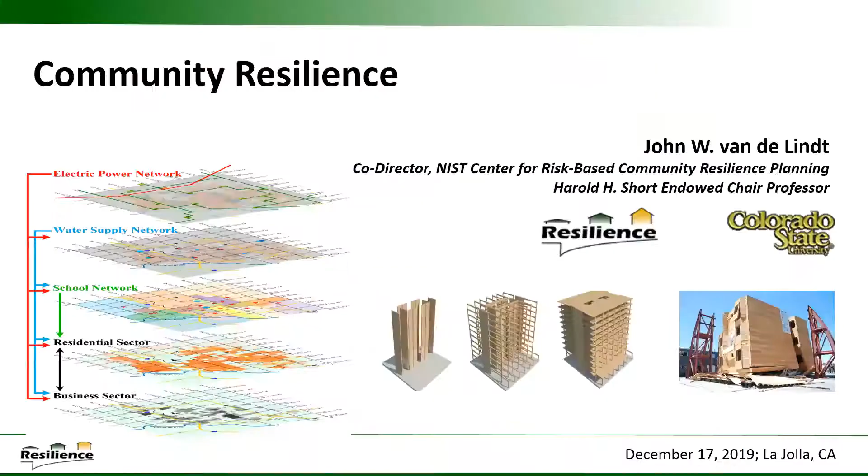So first, let me start with something that we're all familiar with. Some of you are probably still paying back student loans. This is the same Stafford Act - Robert Stafford - but this is 1974. The Disaster Relief Act was created by Nixon, and then Carter moved that forward with an executive order.

Then finally, in 1988, Congress enacted the Stafford Act, and the intent was that local and state governments can develop disaster preparedness plans.

So switching gears a little bit - what's the purpose of having physical infrastructure? Well, if you look at the very bottom of Maslow's hierarchy of needs, in the red, these are the physiological needs - having shelter and food and things like that.

As we move up, I don't know that any of us necessarily get to the top, but when we go to the orange and the yellow, what we're dealing with are things that bring socioeconomics and other specialties or disciplines into play.

And we can't achieve those without that. A good example - you can't read that on the bottom right, but I'll get into that in a little bit. And that's really the motivation for one of our studies.

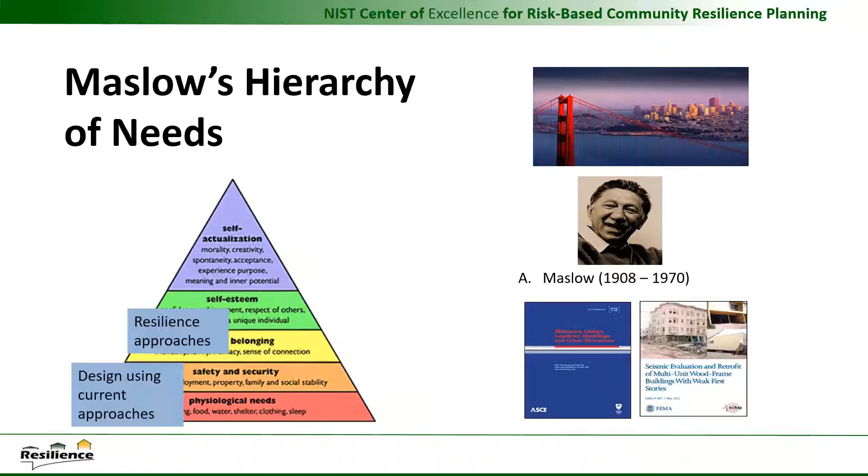Okay, so let me jump to PPD 21. Once a presidential policy directive goes into place, the funding flows. The funding follows the presidential policy directives because the agencies follow that, and they direct NIST, NSF, USDA, you name it.

The White House is essentially directing that and assigning where the funds will flow. So for this one, back in 2013, this was the Obama administration, and this was PPD 21, essentially establishing resilience as a priority for the U.S. This was primarily infrastructure resilience.

If you look, DHS, Department of Homeland Security, defines I think 16 or 18 different critical infrastructures, but to have those then support effectively communities or community resilience. So the big takeaway - these are the three big takeaways that I pulled from it. Of course, it's 3 or 4 pages long.

So community resilience itself - it started actually in ecology. There was a landmark 1973 paper by Holling that talked about ecological resilience. Then it moved into social science and urban planners, and then into economics, and then engineering. We were really late to the party - we were back in the early 2000s in Buffalo and then some other places.

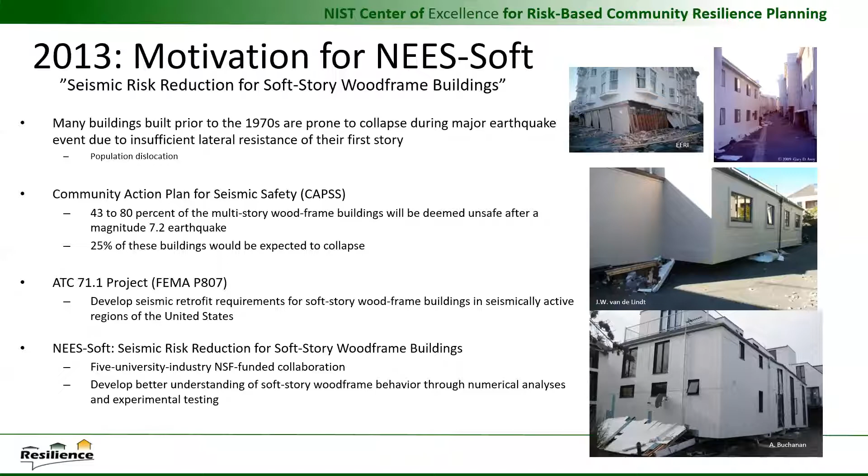The schedules didn't quite align due to availability, so we wound up doing those concurrently. I was flying back and forth from San Diego to Buffalo for a few months, which I liked the San Diego weather better, just for the record.

Okay, so this was the life cycle of the test building. I'm not going to present each one, but I'll talk about them here briefly.

Of course, we had construction and got ready for testing. We did cross-laminated timber rocking walls. They weren't designed to rock like the ones I'll show you for the 2-story and 10-story test on another project, but they did rock, though they weren't post-tensioned. This was done by applying the FEMA P807 software to determine what the retrofit should be. There were walls taking shear in line with the direction of motion, and transverse walls reducing the torsional effect, done exactly per P807.

Within this project, we also had a steel special moment frame designed using the FEMA P807 approach. The idea was to have something practical for designers, but also a performance-based seismic retrofit method developed as part of the project. This was NSF style, taking some work from the early 80s that Anil Chopra developed, and extending it to include torsion and things like that.

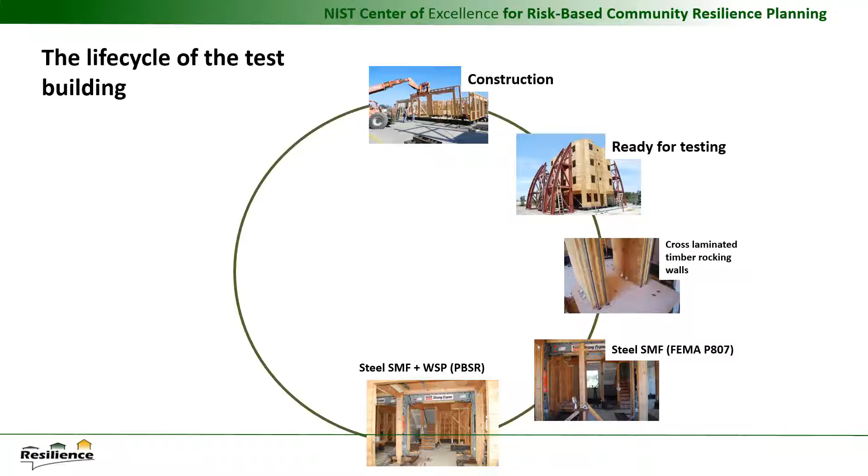We also looked at dampers using a performance-based seismic retrofit, and these were Taylor device dampers—probably the smallest they've ever made, because of course wood's light.

And then we did a collapse test, which is the one I'll show you today. We pulled out all the retrofits.

The main reason, at least for wood—and I think it's the same for most structures—the main reason for a site like San Diego is you can test whole buildings, particularly with wood, because there are so many other components and little parts that you put together. We know exactly what a shear wall does, we can model that, we can model all these components, and then put them together, but our system model doesn't predict it very accurately because there are too many interactions going on. So I've made the argument on multiple proposals that we've been awarded that we need whole building tests.

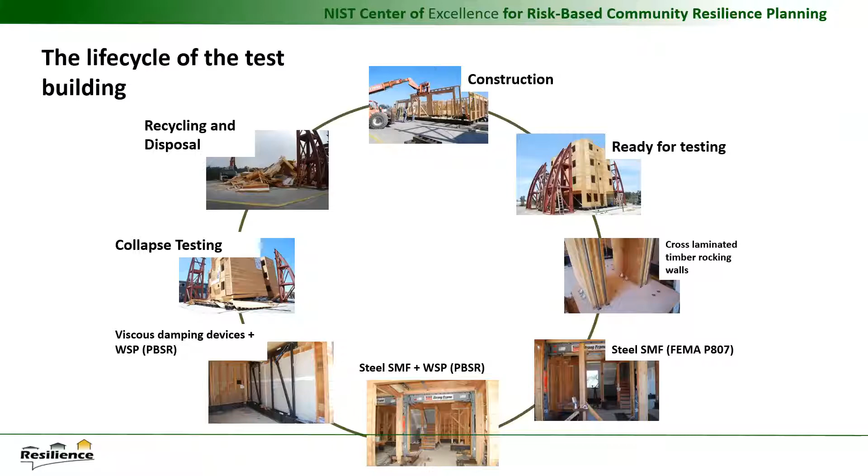And then recycling and disposal—I heard that talked about yesterday, and they did it in a day actually, which included taking all the steel out, so it was fast. That was Casper, yeah. And I think they didn't damage anything of yours too, so.

Some quick construction photos, just kind of going up. We did do a little prefab—you can see that's a wall on the left. We prefabbed some sections of floor and then connected them, so it went up pretty fast, in a few weeks.

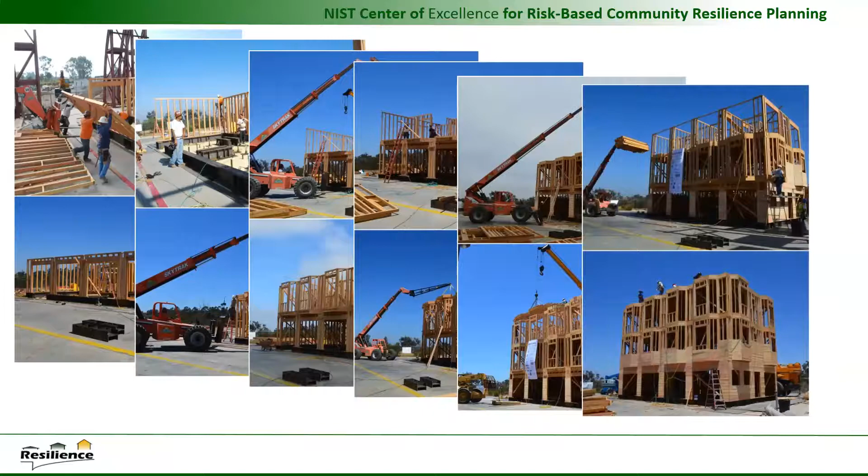These are some typical buildings. They tend to be anywhere from 10 to 14,000 square feet, so they have multiple apartments in them. When I say there are 4,000 to 6,000 of these in the Bay Area, each one has between 8 and 20 apartments with a couple or family in them, so it's a lot of people. And this is what we looked like—not exact, but the best we could do anyway.

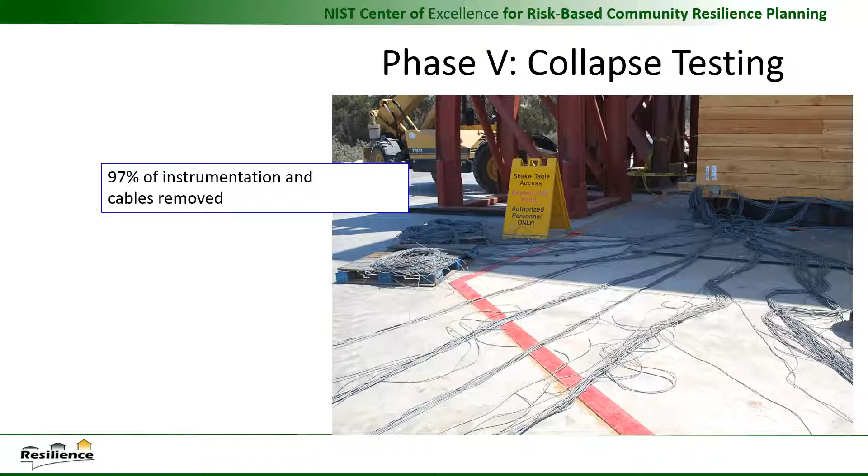Okay, so the retrofits all worked as they were supposed to. I'm not going to talk a lot about that because I want to get through everything today and get to some community resilience aspects. But for the collapse testing, what we did is we removed 97% of the instrumentation. 3% was sacrificial, meaning, like Tara said yesterday, we wrote a check to whoever—probably Robert as well.

And so for the collapse motion, we had to pick what it was going to be. We had been testing primarily Cape Mendocino and Loma Prieta, and they were good motions. Loma Prieta was the one that affected the Bay Area in 1989, and a lot of these buildings were rendered in need of demolition or very serious repairs. Believe it or not, even though it collapsed a freeway, it wasn't that large a motion compared to, say, a 7.2 on the Hayward fault.

So we looked at these, and if you look on the right, the one in the middle, scaled to 1.8 G spectral acceleration. You can see our building period, retrofitted it was around 0.5 seconds, unretrofitted it was about 1 second for a 4-story building. That's how soft these are.

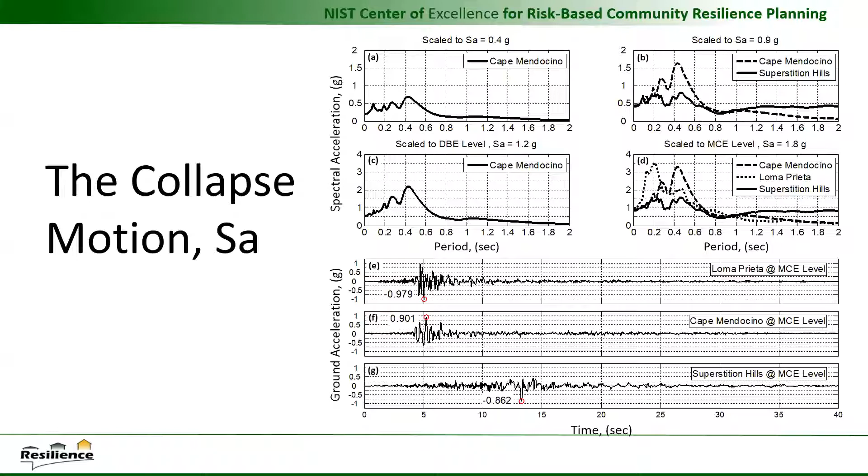Looking at that, at 1 second they all kind of intersect right there. So who cares, right? But then if you take a look at the spectral displacement, the choice is clear. It's Superstition Hills, because if you start at 1 second, we're going to elongate that period probably 2 or more seconds, and it's going to just climb right up.

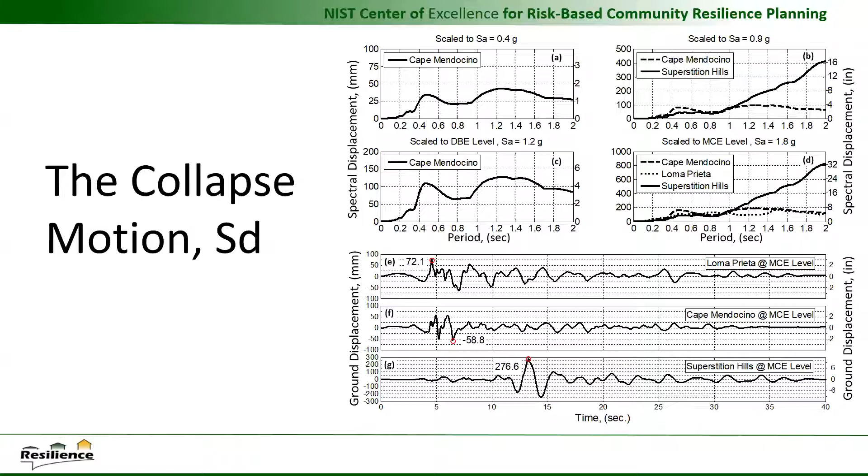I learned this from the Japanese researchers over the years, going to Japan and participating in testing over there. They've done a lot of collapse tests at E-Defense. Lack of strength and stiffness doesn't collapse buildings. It can, but what collapses buildings is geometry. It's basically pulling the rug out from underneath it.

This is our shake. This is Superstition Hills at MCE. And there's not a lot of stiffness on that first story. All the retrofits are out. That's the undergraduate student enjoying himself videoing.

So yeah, sorry about him. Okay, so that was Gabriel. So we're at, he did go on, yeah. That was Gabriel yelling, and he did go on to graduate school.

So it worked. We're actually close to, it settled at about 15 point something, but it actually went to 17% interstory drift at that first level. And the top levels were virtually rigid. Now the interesting thing is those top 3 stories are actually far below code, but the bottom story is so far below, it's so soft that this is what you get.

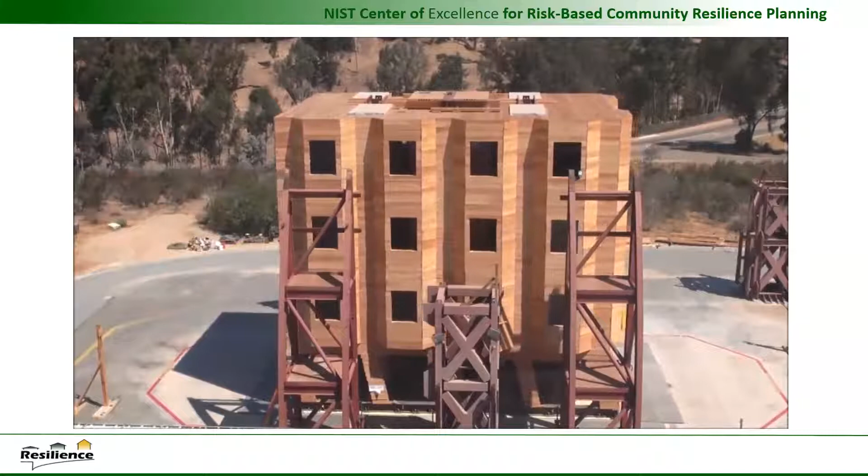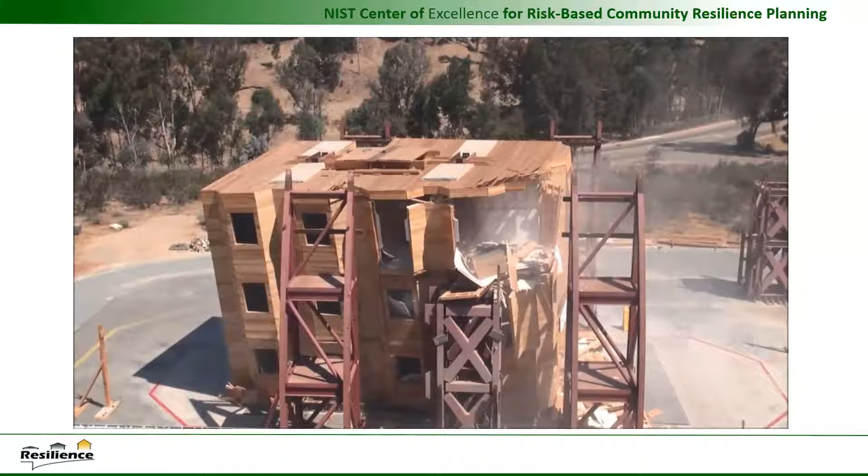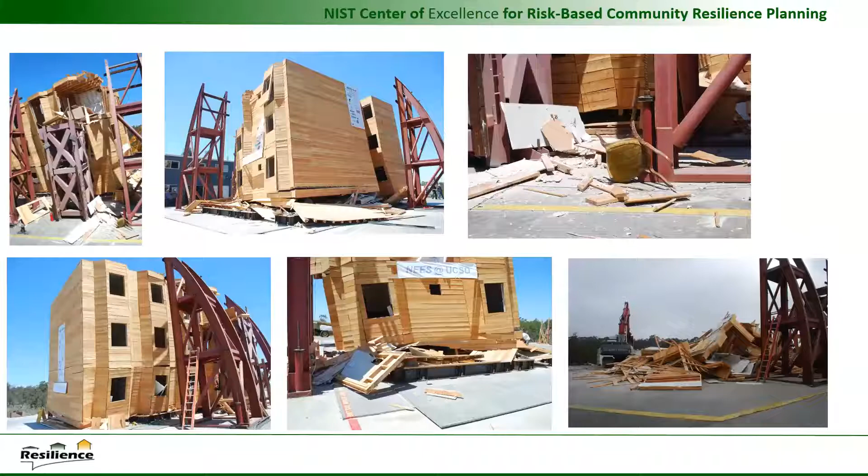All right, so that's what happened to your camera. So this is, essentially, what was a 4-story building. And it would have fallen to the front where the garages were, so it would have probably fallen into the street and blocked the street.

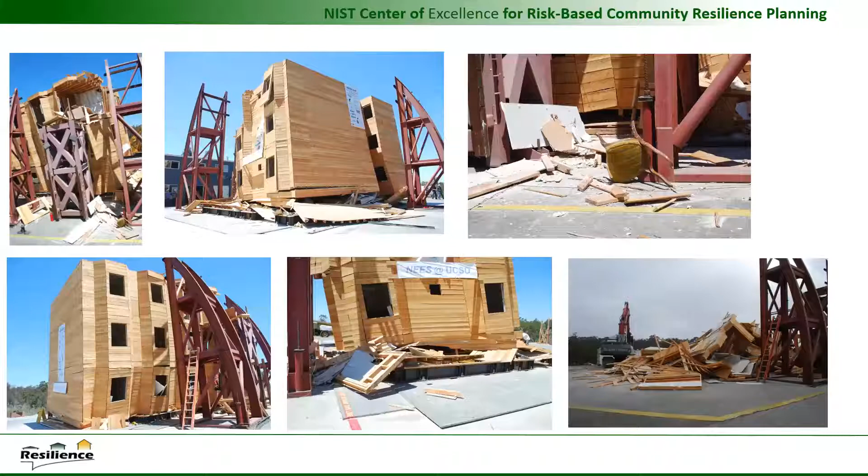Okay, so now what you saw is a building that doesn't perform well, it doesn't satisfy the objectives of society or the goals of a community. So now I want to fast forward.

This is the project you've been hearing a little bit about. I think there was a poster out front from my colleague, Shiling Pei, who's leading this. Lehigh is doing some testing, you saw that yesterday, Jim presented as well on the same project. And those are all, there's 6 universities.

So for 6 universities, to give you an idea, we requested, there were different budgets. Some were 200,000, some were 4, but in the end I think it was about 1.5 million. 6 universities went in as a collaborative project. And then we are fundraising and leveraging to try and essentially close the budget gap for the test that I'll describe here.

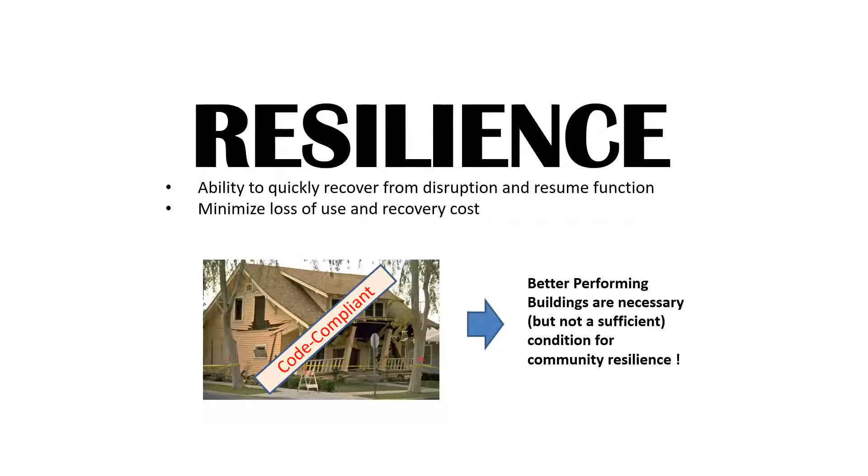But before I do that, just a little bit of, and so these slides, Shiling Pei at Colorado School of Mines had developed these slides some time ago. But he's showing a code compliant building that's in very bad shape after an earthquake, and that does happen.

To give you an idea, mass timber, or in this case cross-laminated timber, it's essentially just these large layers of wood. I think Jim described it yesterday, so I'll skip that. But the research started in Slovenia and Macedonia, and then it moved into Italy.

They did a 7-story test, or 6.5, at E-Defense in Japan, and then there was some Canadian research with FP Innovations in Vancouver. Then we worked on a FEMA P695 process. In fact, just a couple weeks ago we passed the ballot for the Provisions Update Committee of the Building Seismic Safety Council in San Francisco. So we just have a few more votes, and then it goes to ASCE 7. Hopefully you'll see cross-laminated timber and tables, if all goes well, in the next version of ASCE 7 - not fancy rocking walls, not things like I'm going to show you today, but more the bread and butter, build a hotel. You can go up to essentially 65 feet.

And in Japan, Hiroshi Isoda, our colleague, has been doing a lot of work. One thing he said - we were in Hawaii at a meeting a few months ago or last summer - one thing he said: I've been trying to collapse cross-laminated timber buildings for 3 years now, and I can't get it to collapse. And that's because of both the gravity system and the lateral system.

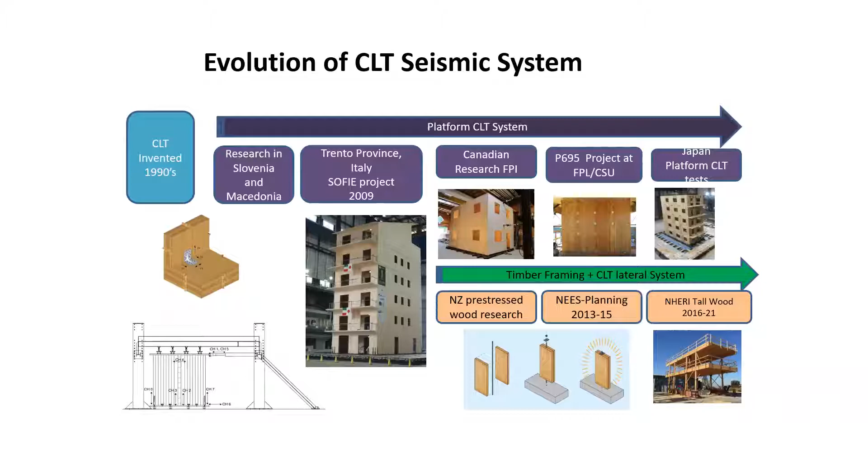This is the team. I won't go through it, but you can probably see it. It's kind of small - I don't know what happened to this.

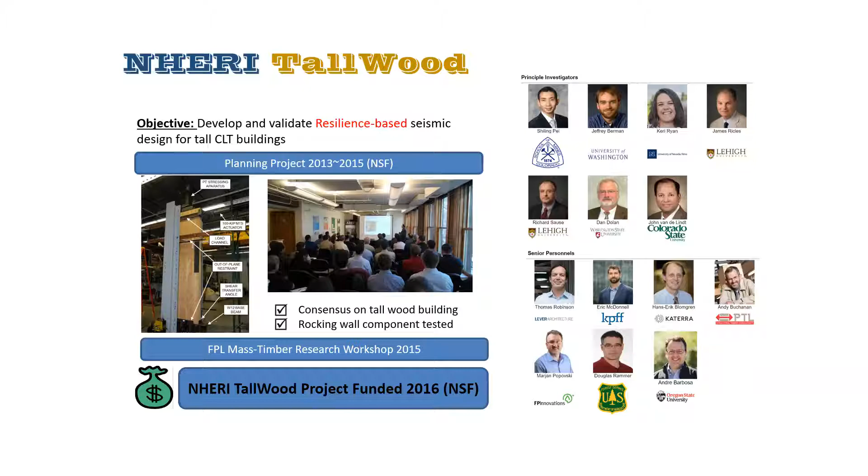And that's the key - you can't test a full building without that. So to give you an idea of the project, we did the 2-story test. There's testing at Lehigh, and I think that's going to bleed right into January 2020.

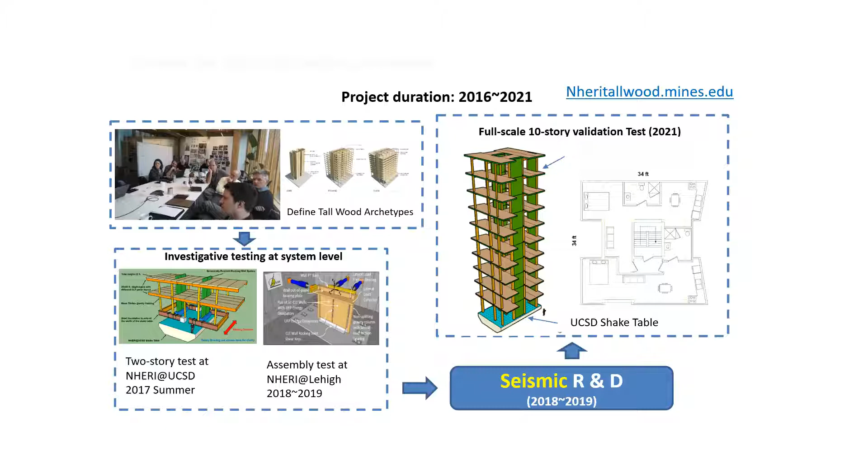And then the validation test - that's a collapse test, right, Joel? Are we doing a collapse test on the 10-story? Unless something goes terribly wrong.

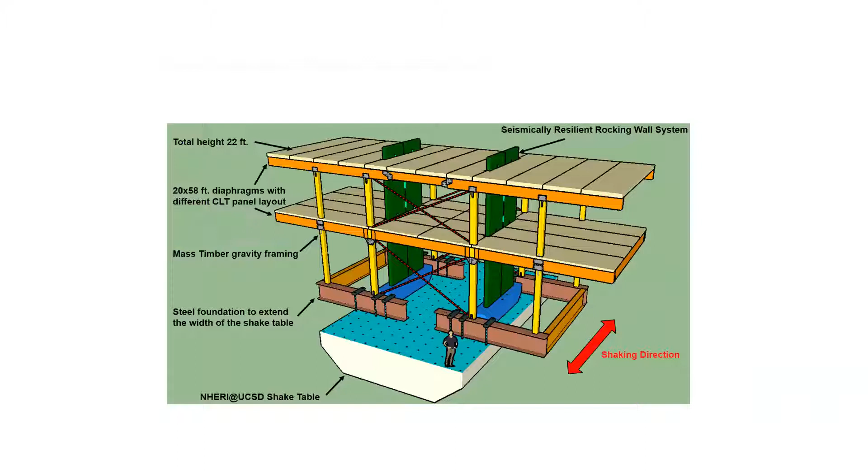So this was the specimen. You can see we're going to shake this direction, and you can see we're actually quite a bit larger - this was 50-some feet, I think 58 feet. So we're taking advantage of the fact that wood is light, and so this whole building is about 160, 170 kips.

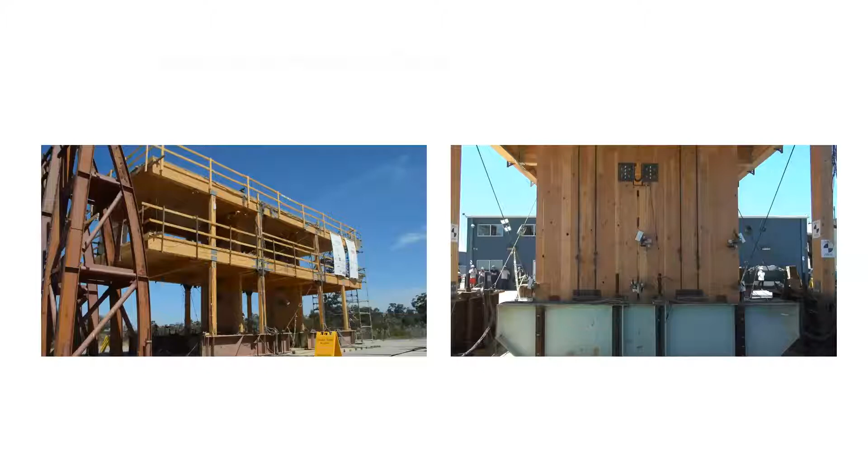And so these are post-tension rocking walls. You can see the post-tension rods here. Jose had mentioned the U-shaped clips there. I was going to try and get both these to play, but I don't think I can, right Robert? So I'm going to just hit them both, and - oh, it worked, okay.

And that, I believe, is Northridge Canoga Park. We're running the same record twice.

You can almost guess the period of the building, can't you, just hearing that? Exactly. Okay, and then here's another one.

The other one started by itself - Robert, the other one started by itself. Should I just click it? Okay. Same test.

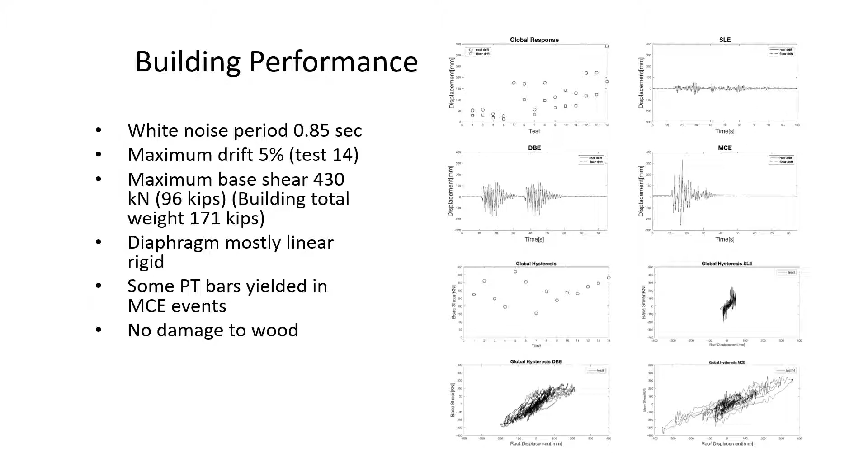And one thing I would say is don't underestimate the number of bodies you need on site. More people - don't ever refuse anybody unless it's a troublemaker. Otherwise, invite them.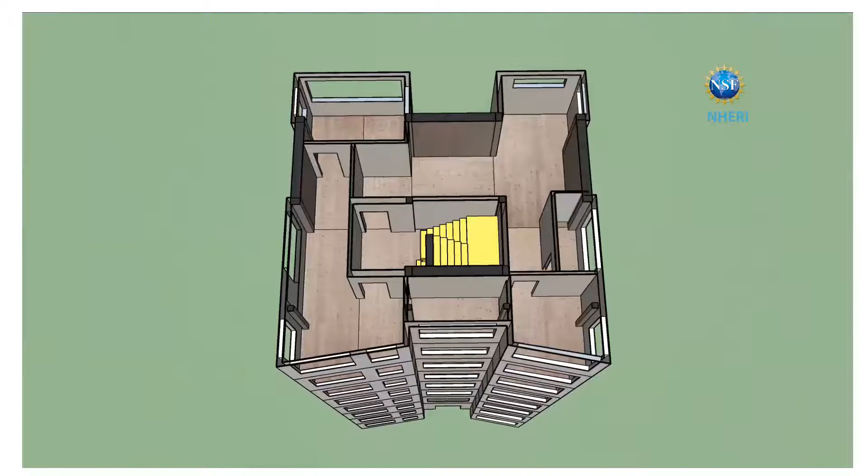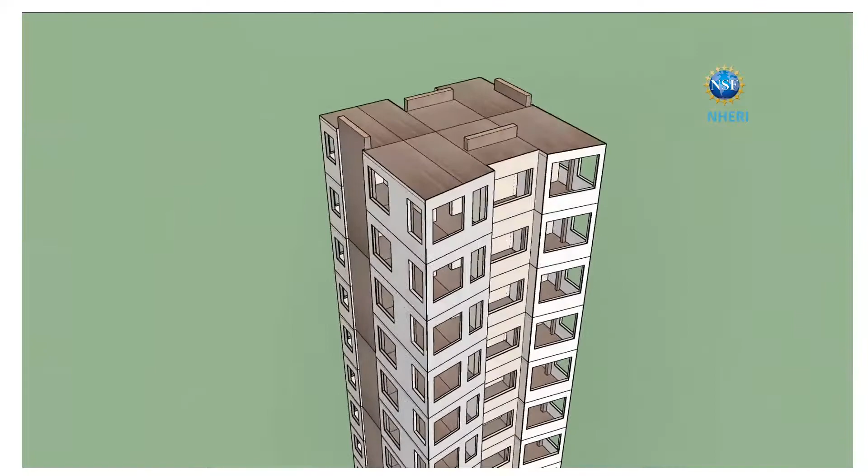And so this, so you can see it'll be - we're also considering, in talking to MKA Seattle and some others, we're doing some fundraising, so we may have some diaphragms that are nailed in under mechanical fasteners. Sometimes you have to, at least with these big projects, make concessions and include something you didn't originally write in, and just make sure that it works with your objective. You don't want to scrimp on any of those.

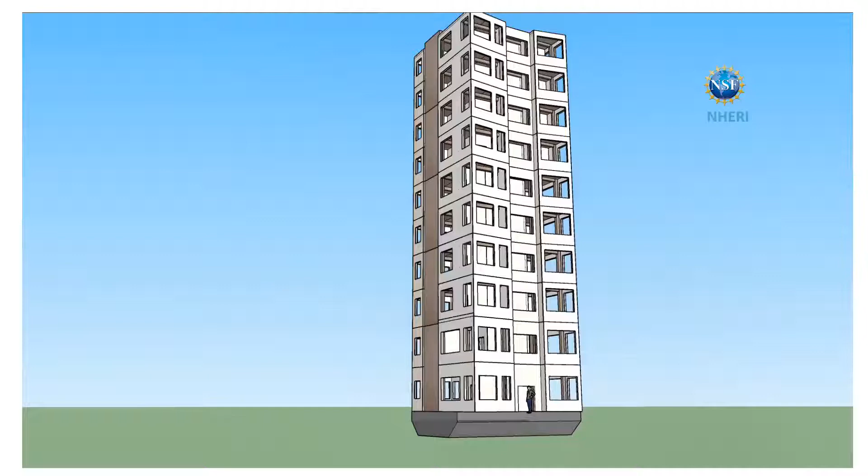So, no, this was it. Okay, well, I won't show you the whole thing, but...

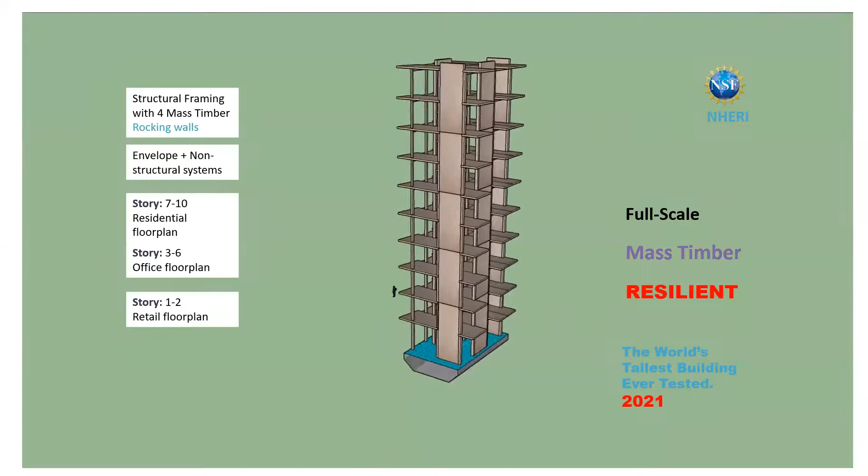And if the music's not making you smile.

All right, I'll go ahead and jump past since we've seen it. But so...

I mean, like completely over. And then in 2021, we'll be doing some staging in the spring, starting construction, and then summer is the shake table test.

Excuse me, I forgot this part. So probably the most important part is, not every Friday, but almost, for 2 to 5 minutes, almost every Friday.

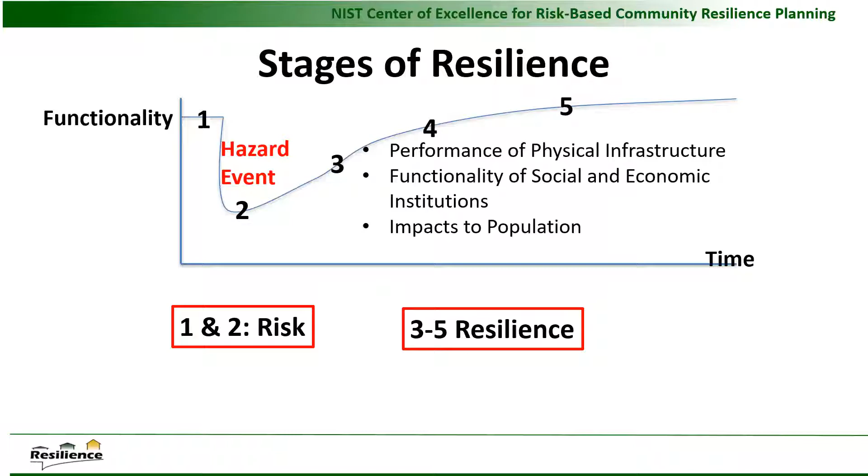To give you an idea, within the NIST Center for Community Resilience Planning, we're in the process of renewal review. We hope to have another 5 years starting February 1st. We'll know here in a few days, I think, actually.

To give you an idea, these are some of the things that are going on. But these are all areas where, even though they're being worked on, there are huge gaps—for example, earthquakes and tsunamis in succession.

We've looked at, people in the center and others have looked at modeling the earthquake effect and then the tsunami hitting. But do we have fragility for that? No. We have some—we have a method for it, but the capacity is not there.

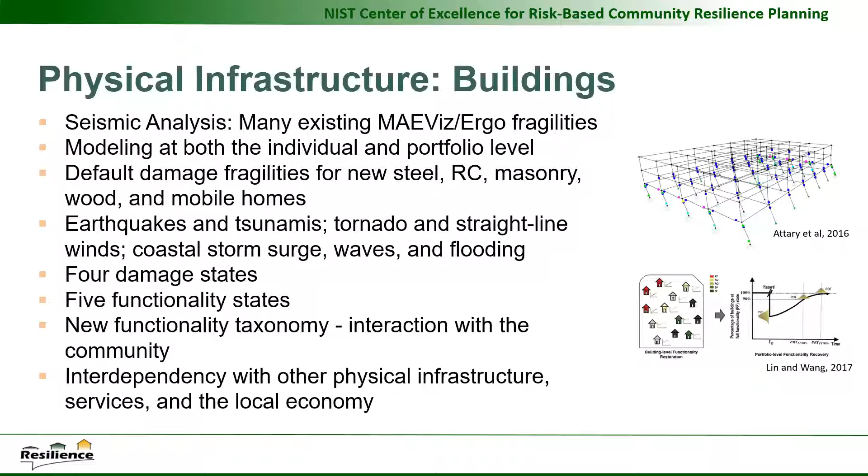So there's all sorts of physical infrastructure, transportation. I know Joy said they don't necessarily fund some of this, but they do fund it in the context of resilience—they fund network analysis, things like that.

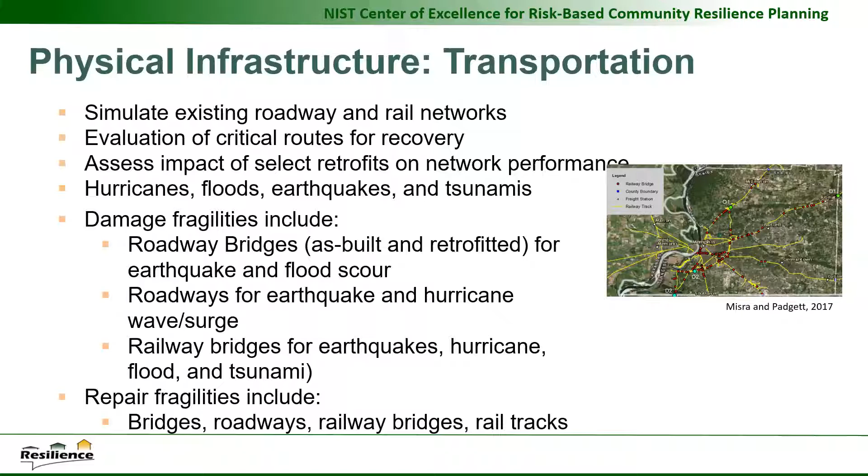So if you write it fundamentally, and don't just say 'I want to test this bridge,' but write it fundamentally and treat it as a basic research problem, then make the example application something like that, they will definitely review it.

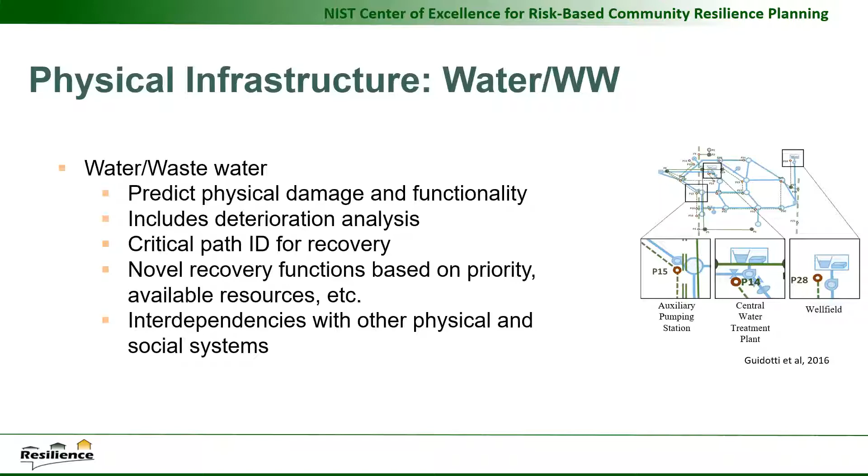...for the project, and the idea is to find that intersection so the building isn't the weak link, to make it functional—the building repair, I should say.

And so looking at electrical power networks, natural gas networks, telecommunications, and all of these things interacting with the buildings.

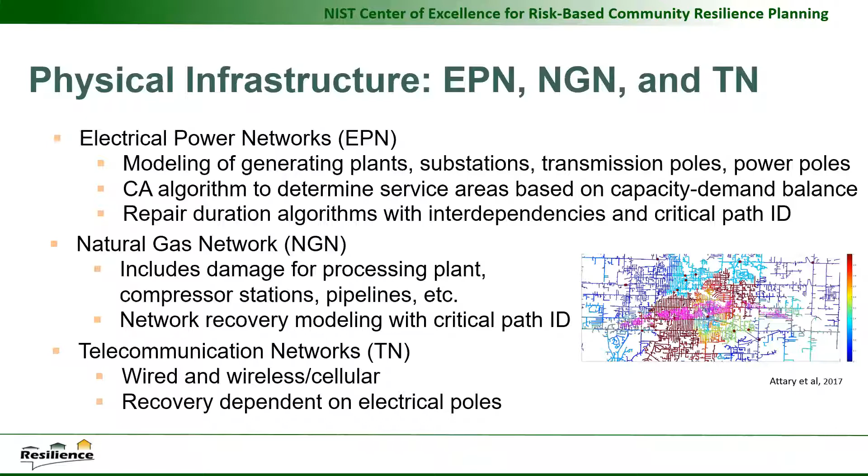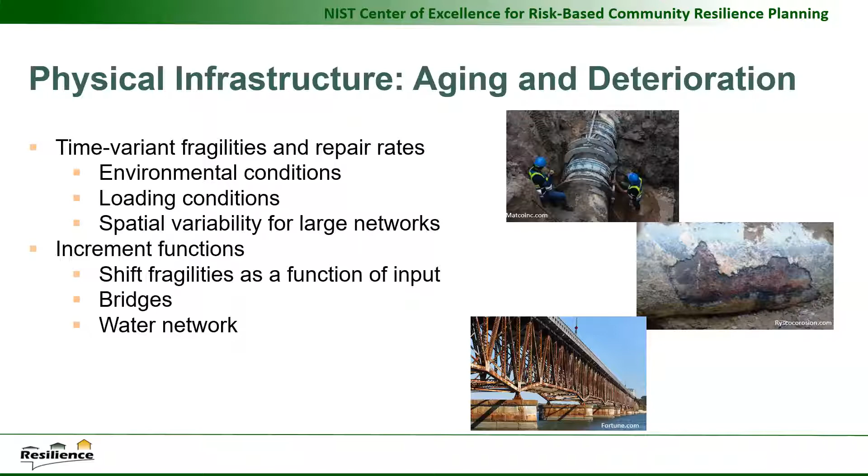And then aging and deterioration—this is, most of what we do now as civil engineers is fixing messes and things that have deteriorated. New is great, but that's not what's out there.

And then one of the keys, and I definitely encourage this—I've been working with—this isn't engineering.

This is a computable general equilibrium model, with thousands of different equations that basically describe all the input and output to a community. It's actually used for natural economic development in the region. We've been able to reduce community size, and the bigger the community, the more accurate it is. We've done it for Seaside, Oregon, which was only a few thousand people, maybe 6,000 or 10,000, and it'll predict losses in production, wages, all sorts of things.

There's your societal impact.

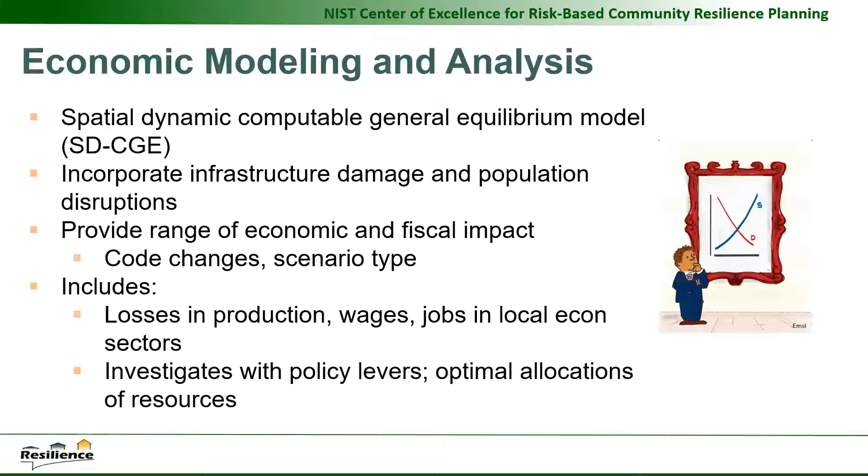And then social science and modeling, I talked about this. Seems really quiet in here, is it because there's no videos?

Social science modeling and analysis, population and employee dislocation, these things are huge, because without a population you can't be resilient if you're missing 20% of your population. Housing restoration and recovery, and business interruption is big. Small businesses can go about two weeks without funds, and then they're gone.

A lot of this is based on socio-demographic and socioeconomic vulnerability data.

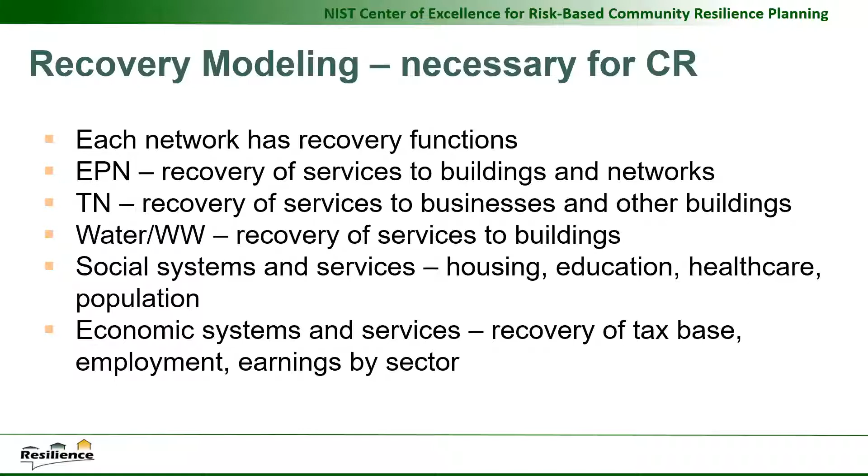So one of the huge gaps, probably in all of this, is that we have a number of recovery models, but getting them to interact, I think there's a way to bring that into a broader project to round it out. That's something a big project was developed for. But for recovery, the key is you don't want it to just be engineering recovery, because just like a building, you can't do any work until you get the permit, and you can't do any work until you clear the debris. So there's a lot of things that aren't engineered.

And then optimization and decision making, this involves not just optimization for direct economic impact, but optimization for long-term impact that's computed from the CGE model. So that's the idea of these things.

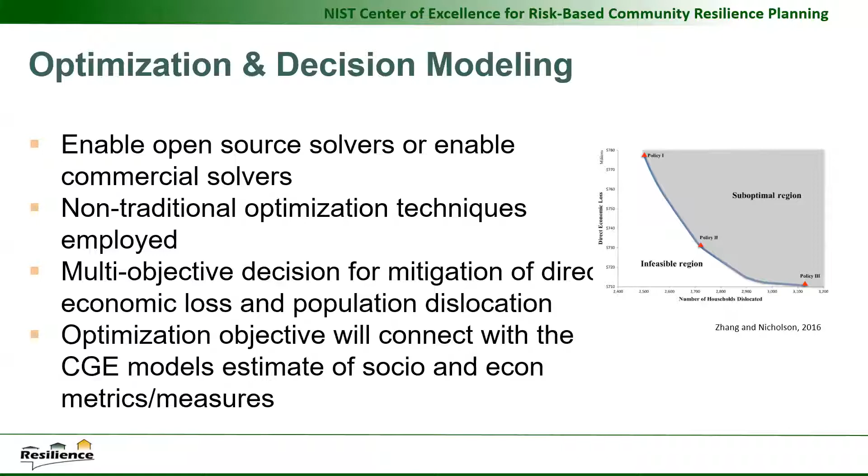I'm going to wrap up here in just a moment, and hopefully we can take a question or two. Just to give you an idea, this is the center, and we're working on all of that, but there's way more work than we'll ever be able to do. It's a 12 university partnership with the National Center for Supercomputing Applications.

We've been talking with the Sim Center, and with the NHERI Sim Center, trying to figure out where the commonalities are, so we can probably put on some data workshops with DesignSafe CI and things like that. We're starting to do that, we just had a call about a month ago.

And these are the three thrusts within the center. I think I'm kind of out of time, so I'll just wrap up in two minutes here.

We do have a number of test beds, and two of these are going to be available on Friday, and we'll be releasing open source software. It's in Python, so you do have to code in Python, or your students do, not you guys.

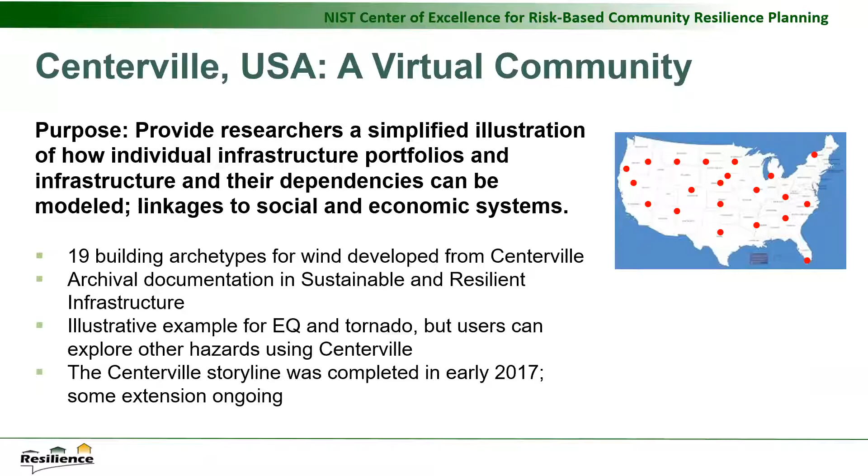And that's called InCore. Seaside, Oregon will be one of those releases, so that'll be an example. There'll be a Jupyter notebook that will be an example for that.

And there's MMSA, which is a big one, and then Galveston, and then the Joplin tornado will be the other one.

So to close, I want to come full circle back to the Stafford Disaster Relief and Emergency Assistance Act, or the Stafford Act as it's known. Many of you may be familiar with this, but last year the Disaster Recovery Reform Act was passed, which essentially authorizes pre-disaster mitigation funds. This is through the Building Resilient Infrastructure in Communities program, or BRIC. Did anybody know that was passed?

As disasters happen and funds start to flow, I want to underscore that creating resilient communities is a multidisciplinary endeavor. Buildings, lifelines, social institutions, economics, and then governance is key. Governance is hard, it's very hard to model, I'm not sure how.